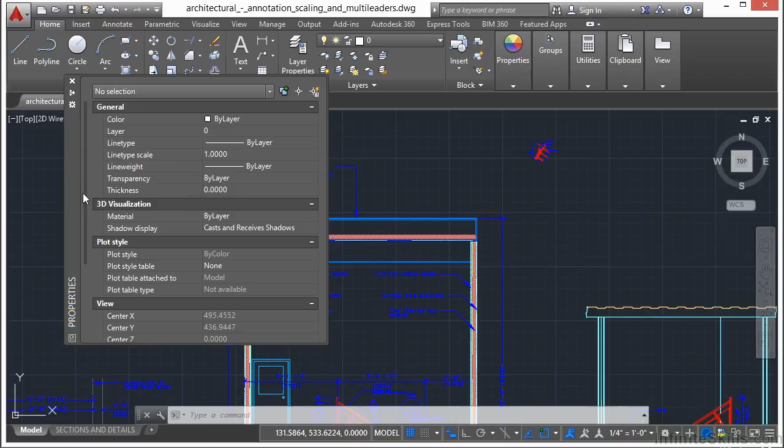If you click on this little button here, that'll auto hide it. And when you mouse over on it, it'll pop up. This little button here gives you different properties that will allow you to move it, to dock it left or right and anchor it, set up some transparency, etc. I typically leave it the way it is, and I typically leave it docked here on the left. So right now I have nothing selected because it says no selection, so I know this. Plus I know that I haven't selected anything either.

But when I pick something like this object here, it'll tell me what it is. It tells me it's a multi-leader object. And then it gives me general information. That tells me the color, the layer, the line type, etc. Then after the general box, and you have a little scroll bar here you can left click on and drag up and down, goes the miscellaneous section. And that just gives you some overall scale items and some bit of information.

And then it gets more specific. What I mean by more specific is that it has object specific information in it. Like for the leader and for the text. It tells you the context, it tells you the leader types, etc. If I scroll all the way down, I can get to even more information on my object.

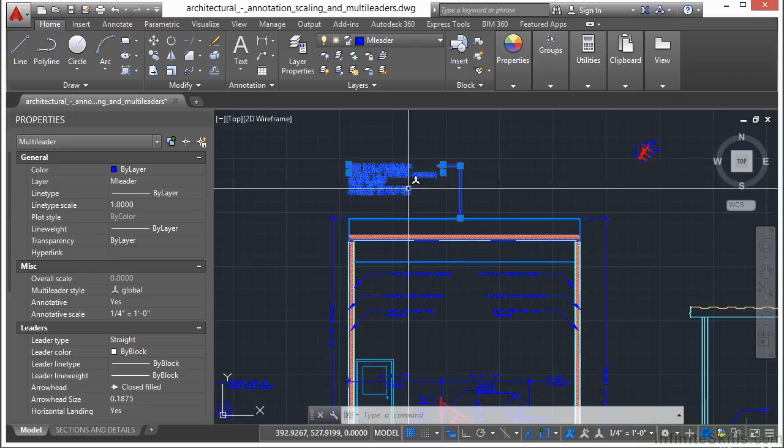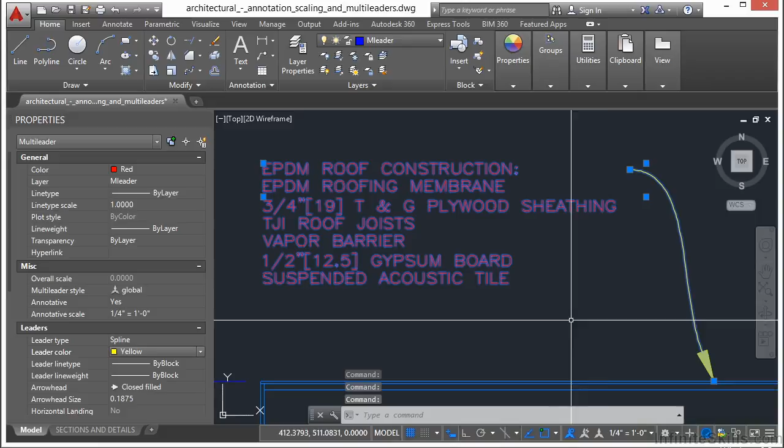Now the really cool thing about the Properties palette is that I can make changes to my selected objects. Right now I have this text selected and its color is set to by layer, but I can change it, as you can see here, to different colors just through the Properties palette. I can also change some of the other options on this. I can change that from a straight leader type to a spline. I can even change the color of the spline. And when I unselect it, I can't make the changes to it anymore, of course.

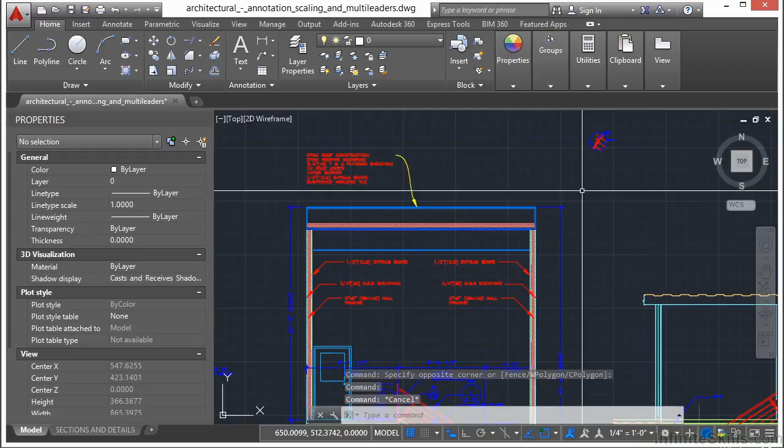And the other cool thing about the Properties palette is that if I select multiple objects, it will tell you how many objects and what type that you have selected. And I can make these changes to all of them all at the same time. Now, if you have multiple objects selected that are different types of objects, it will give you just a little bit of information on here, and it will only look at the types of information that they all share. And typically that's going to be what's in the general section. So I can change the color of everything all at the same time. I can change their layers, I can change their line type, or their line type scale.

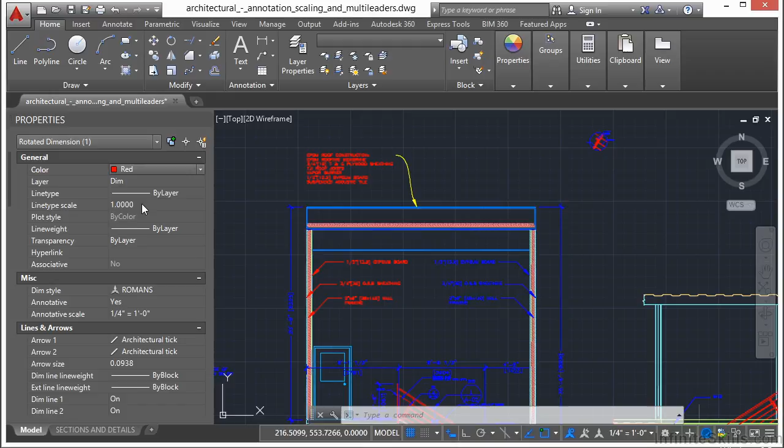Now, if I have everything selected and I want to look at a specific type of object, I can click on this arrow here and it will list how many different types of objects I have of those specific types of objects. So if I want to take a look at my rotated dimension that I have selected, I can. I select it, just that one option, and I make the changes to it. And only that one object type will be changed. I can go to my lines and I can change the colors of my lines right there, just like that.

So you can see you can make a lot of different changes to your objects through the Properties palette. I always leave this open all the time on my day-to-day working with AutoCAD because I can do so much with it so easily and so quickly, and it provides a lot of information to me.

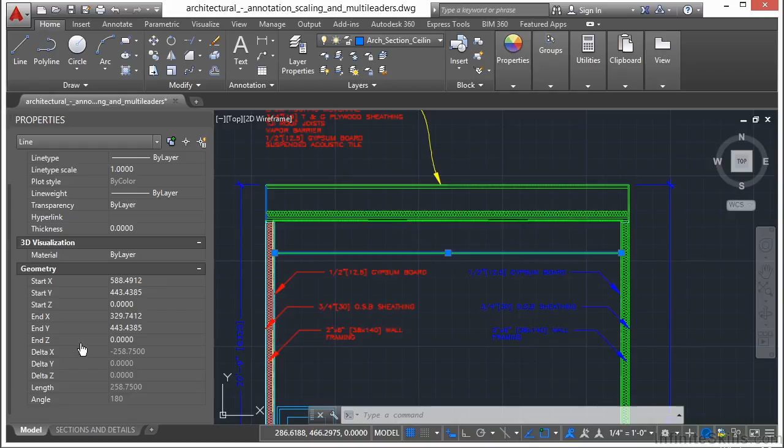For example, if I select this line, just that line, it tells me my general information. If I scroll down, it also gives me my length. It tells me what angle it's drawn at, and I can get the coordinates for my starting and end points. If I have a closed object or a hatch pattern or a polyline, polygon, etc., it will also give me the area of that object.